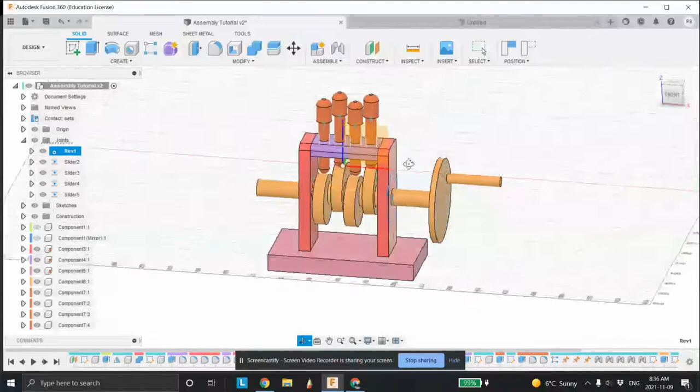Today I'm going to show you how to make an assembly like this. An assembly is components arranged together and designed to work together. In the old days when we used to have to design stuff, we had to do the top, front, and side view, and then you had to picture in your mind how things would work together.

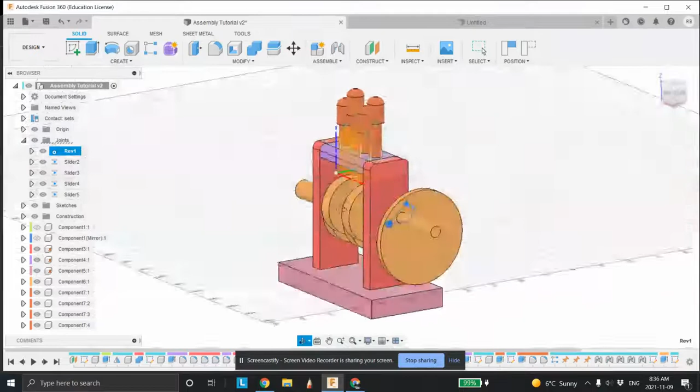Nowadays with more complex assemblies, this is a really nice way to design stuff. If I come in here right now, I can see it animate the model, and you can actually rotate it around and see, look for interferences and clearance issues and so on, to see how it's working. It's a really nice way too, when you're in a meeting, to explain how your design's working to somebody. Rather than articulating it, you can show them here.

So I'm going to hit the escape key. I'll show you, you can animate just the joint itself here, or you can come and actually drive the joint yourself and move it around, so you can see how it looks. You can rotate it around and move it wherever you like.

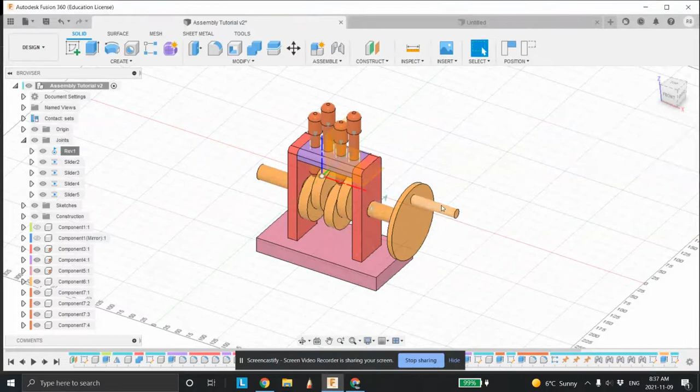So come over here. First thing we're going to do is I'm going to design these pieces here: the two side pieces, the top piece, and the base. And you can see what I've done here. This is a separate piece because what you would do is you would drill and tap these holes here, and you would mount these pieces across this way because these would be three separate pieces.

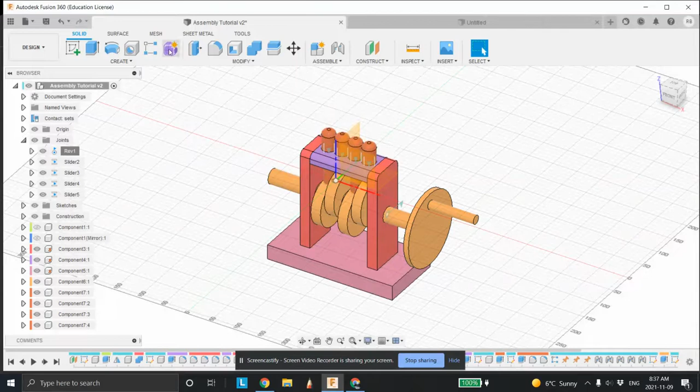Okay, so back to the original position. Now what I'm going to do is go to make a new piece. I'm going to come here and make a construction plane. I'm going to make it symmetrical, so that we're going to design something on this side, click the construction plane, and it'll mirror it on the other side. Makes it a lot nicer, faster way to do it as well.

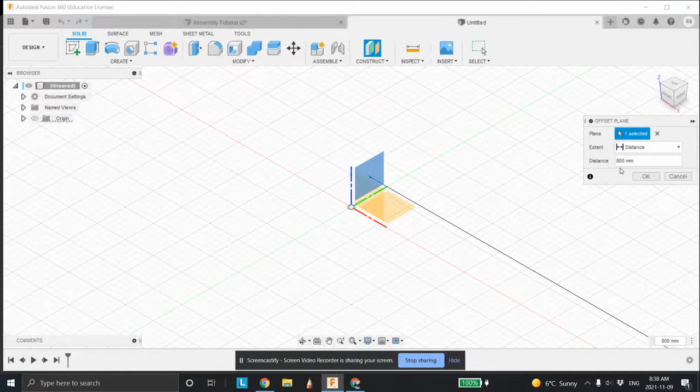Okay, so first thing I'll do is create a construction plane, click this face here, and I'm going to bring the construction plane over 80 millimeters this way. So 80 - well, that's 800. You don't want 800, you want 80. There we go, click OK.

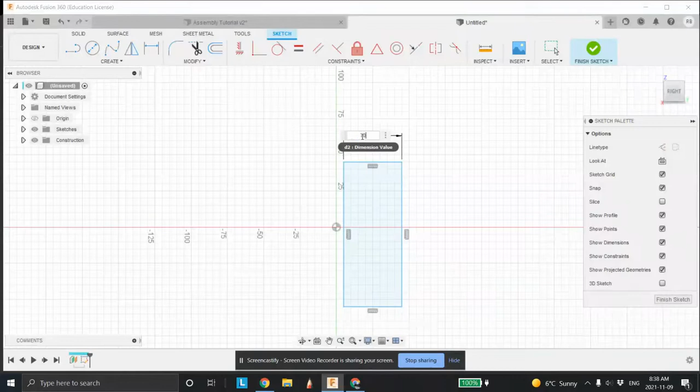Now I'm going to draw that piece here on this side of the one leg. I'll use the rectangle tool for this one right here. Come down like this. I'm going to make this size up here - I'm going to make it 70, and this one here, maybe like 200 millimeters high. And I finish the sketch.

And I'm going to right click on this one and press pull it. I'm going to pull it inbound, say 20 millimeters. It is 20. Perfect, done.

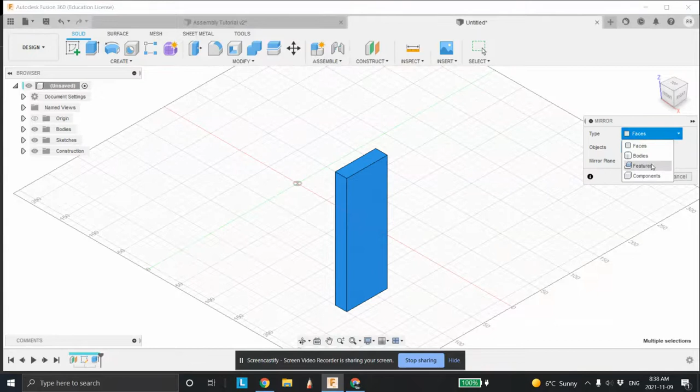And then what I'm going to do is come up here and mirror it. So I'm going to window this whole thing in. The mirror command is here. I'm going to select the bodies right here - there you go, the body selected. I'm going to make a new body. The mirror plane, I'm going to select it there, and click OK.

Now what I want to do is double check and make sure the dimensions on the outside are the right size. So let's measure it from there to here - 160. So 160 millimeters on the outside, 20 and 20.

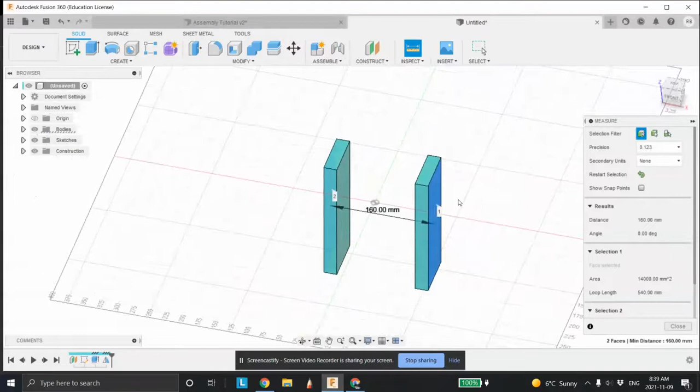So that looks good. Now what I'm going to do is make the bridge that goes across this way. So click this one here, I'm going to sit on that face right there. And when I do, you can see what happens - now I can't see it. I can't see the face I was drawing on because this one is blocking it.

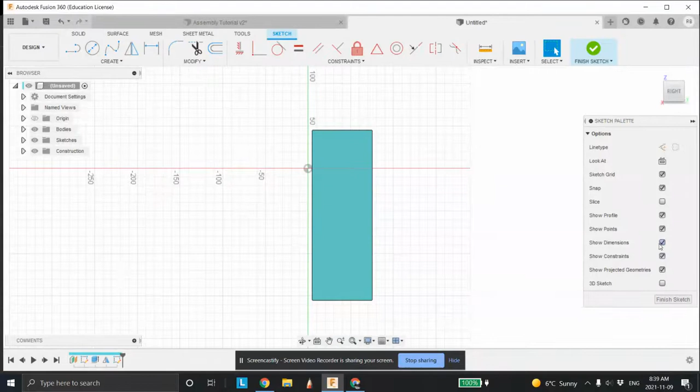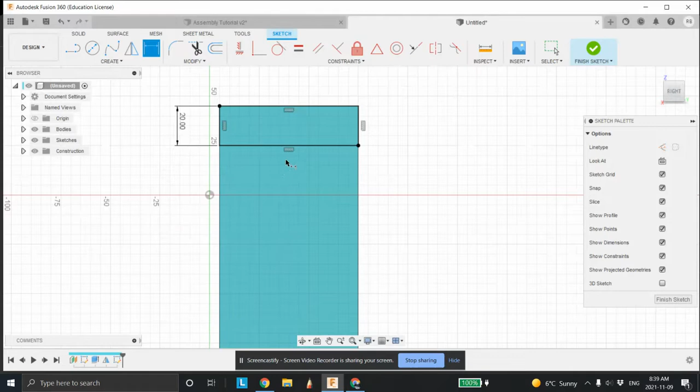So a nice thing to do is click slice. Now what the slice does is it removes that front piece that I was looking at, so now I can clearly draw on this one. So let's use the rectangle tool - come here, down to there, and set the dimensions up. I want this one to be the same as the rest of it, so 20 millimeters. I could have made it a little bit bigger, doesn't really make any difference. And now I can come up here, press pull it, and I'm going to come across.

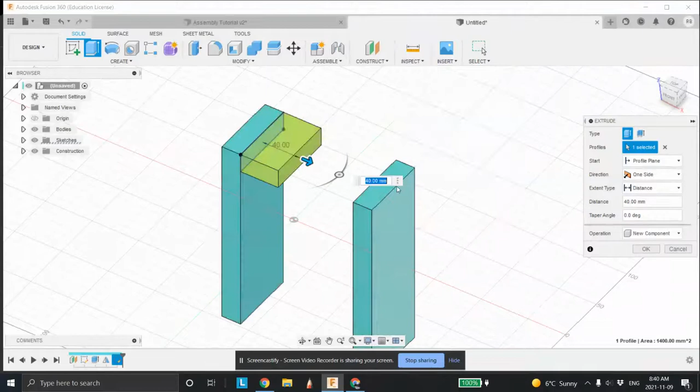Now I want this one to be a new component. As soon as I click new component, you can see what it does—it changes colors. That's because I have component cycling turned on. If I didn't, it would just be gray. I like to keep component cycling on when doing stuff like this, so I know I'm working on a new component.

I like to make things on components, so I bring it right up to there—touches there nicely. Everything looks good. Click OK.

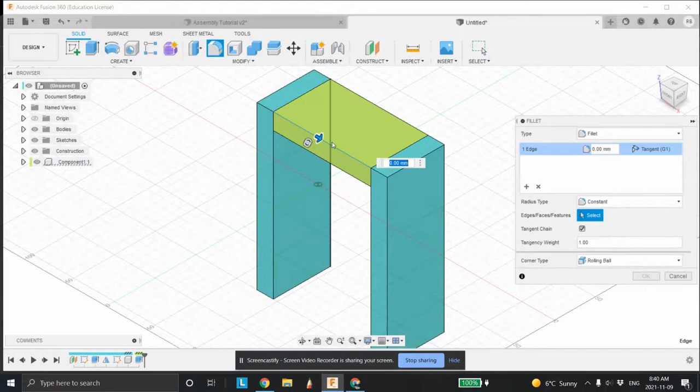Back to this home screen, now let's put some radiuses on it to make it look a little more professional. Just the top for now, we'll do the base in a second. I'll take the radius tool, come here, and set it to 5 millimeters—maybe the same here too, just to break the edges and make them look more professional. You could go bigger, like 10, but I think 5 looks good. So 5 millimeters and 5 again.

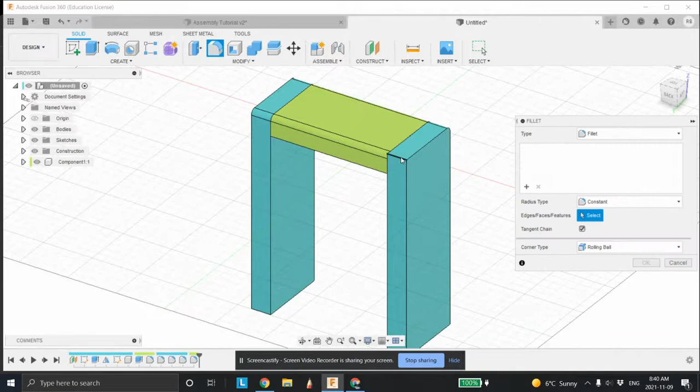Now I would normally put a screw here and a screw here to bolt these together, but I'm not going to bother for this at this time.

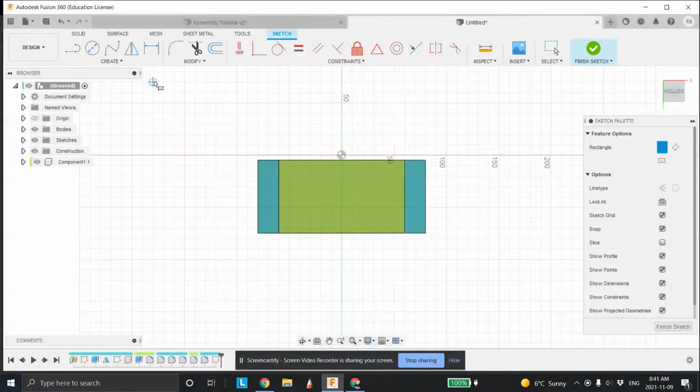Now let's flip it upside down and draw on the base here. I'm going to sit on that face right there and draw a rectangle, a 2-point rectangle, something like this. Size isn't really important. Let's check the dimension between here and here.

Let's set that to about 35. Let's do the same thing down here, from here to here—also 35. And from here out, let's just be consistent and make it 35 as well, and from here to here, 35 too.

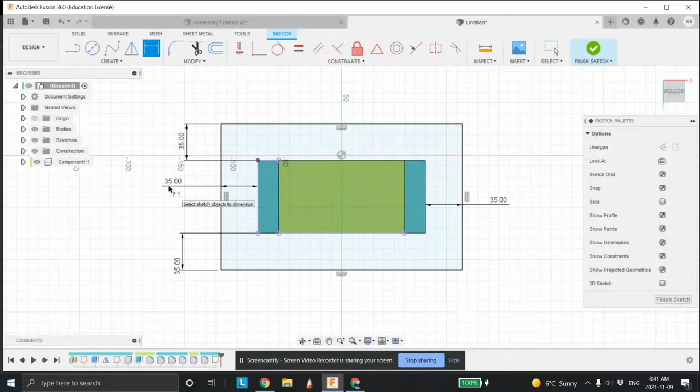Finish the sketch, flip it up the proper way so it flips around like that. Right click, press pull. Now when we press pull, we want to make sure it pulls everything—you can see right there it wasn't going to pull this. It doesn't really matter, but I think we should make it look good.

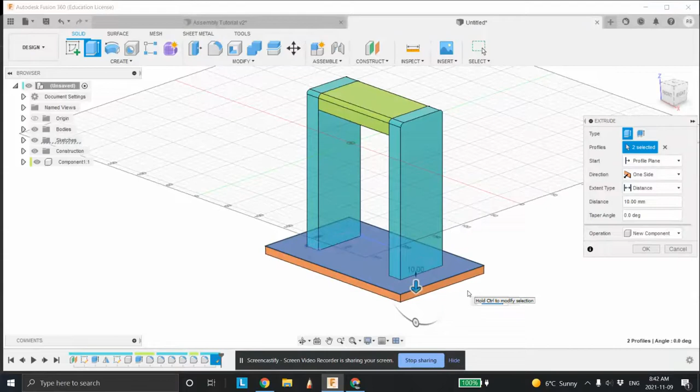Again, we want to make a new component, so it should change colors. The base doesn't have to be too thick—I think 10 millimeters would work nicely. There you go, so we have that.

Now we're going to put a hole through here so we can start working with that. I'm going to hide this thing because it's getting irritating, and let's put a hole in this piece right here.

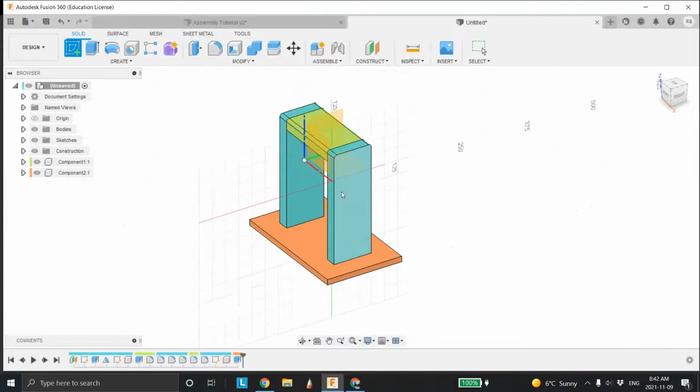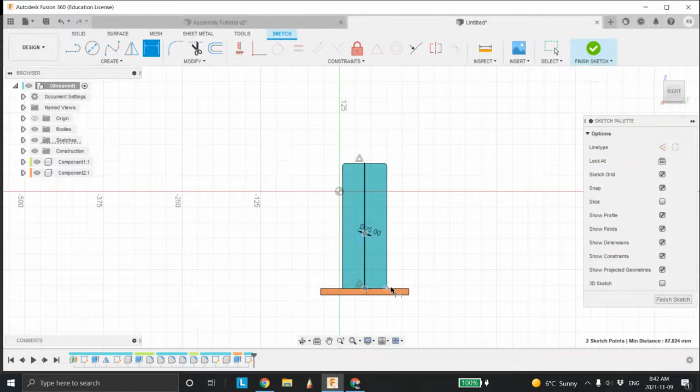We'll sit on that face here. I'll draw a line down the center, from the center of this to the center of that, to use for drawing my circle. I'll bring my circle tool in here and make it 25 millimeters in diameter—that should work nicely. Let's set the dimension from there down to the base at 100 millimeters and finish the sketch.

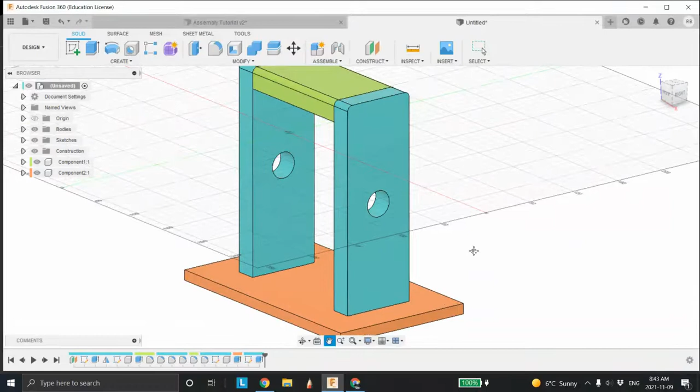Now I'm going to come back and delete this construction line here—I don't need it anymore. Then I'll take this and press pull, pushing it right through. You can see it's in cut mode, so it's cutting a hole. So we cut the hole, and there it is, cut through now.

Now let's make the bar that goes in the center. We'll sit on this face, and let's slice it so we can see where we're working. We're going to click the bar here in the center of that thing—I think 40 millimeters should work.

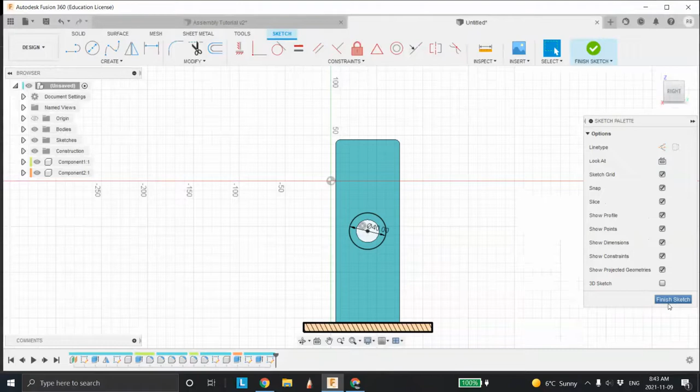Finish the sketch. Now I can click this one here and hold the control key down, then click this guy too, trying to get them both—sometimes you have to play around with it. There you go. Control, right click, press pull, and let's pull him over. Again, I'm going to make a new component, and this component I'm going to use for a few different things.

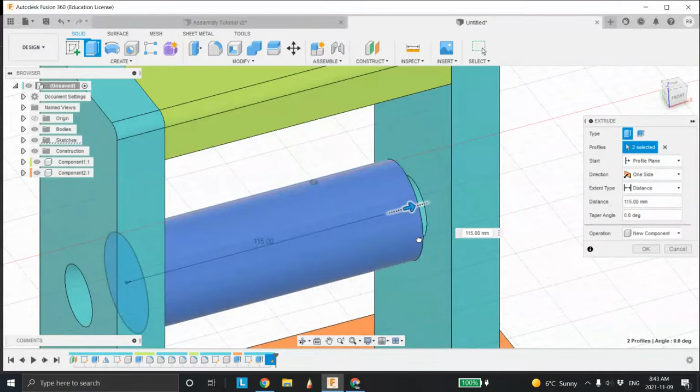So I'm going to bring that guy right over until it taps onto there. Perfect, click OK, it's a new component. Good. And now I'm going to come in here and bring a spindle through there.

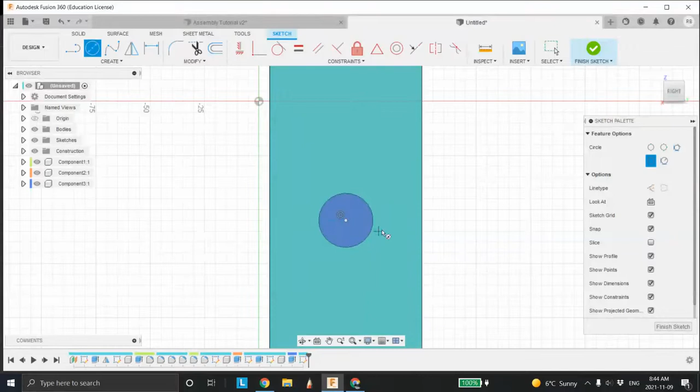So I'm going to sit on this face right here and draw it on that face, the same size. It would have to be a little bit smaller because otherwise it would jam, but for this purpose today, we're okay. Finish the sketch, right click, and press Push/Pull.

And I want to join it to the original. So let's bring it out. Let's see how far I want to bring that out. 60 millimeters, let's go 80. 80 looks okay. I click OK, and now it became part of that component.

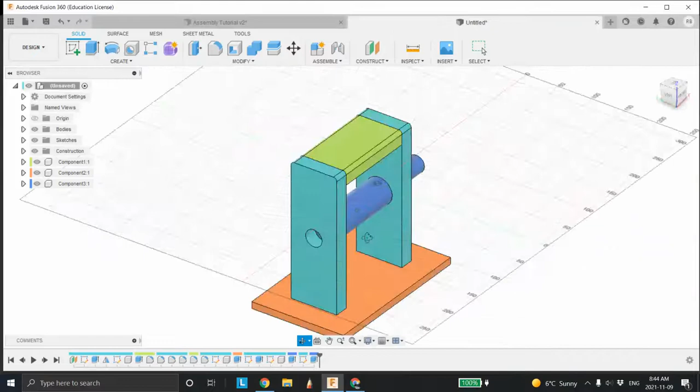Now I can come over here and draw another one on that side, or I can use my mirror tool. Once again, I can say mirror it, and let's put this little guy here, bodies, feature. Let's grab that feature and select the mirror plane here, and he's gone on the other side, and he's joined as well. Okay, now we want to go in and start putting the holes in there.

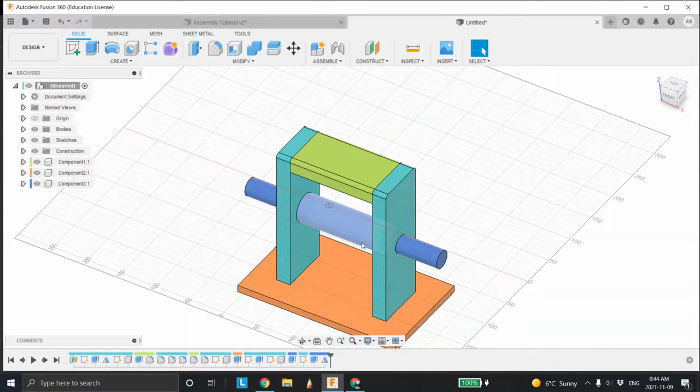What else have I got? Let's put the holes across the top. So what I want to do, actually, no, let me think this for a second. Yeah, maybe I will finish the holes across the top.

So we're going to come up here, sit on this top face, and I'm going to put the line from there across to here, like so. Make sure it's recording, and I'm going to draw that line across.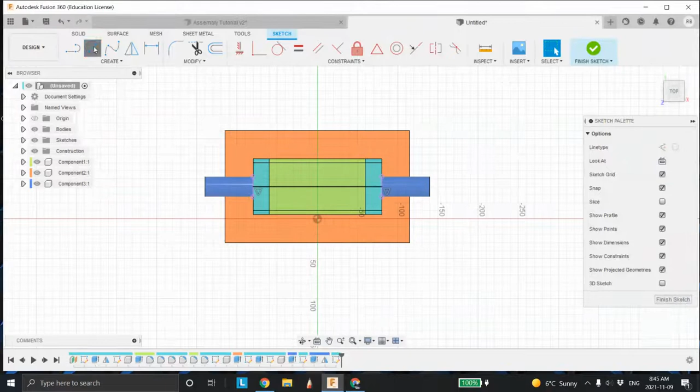Now I'm going to bring the circle tool somewhere like this here, and I'm going to make it 10 millimeters. So come here and go 10 millimeters like so.

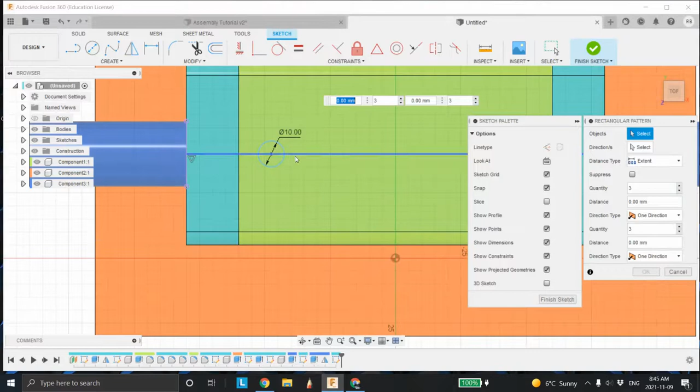Now I'm going to stay in sketch mode right now, and I'm going to go to rectangular pattern, and select this line here, and select the opposite direction. I'm going to change it to spacing, and I've selected it already. Object selected. Direction I have yet to select, so let's select the direction this way, and I want 4 of them.

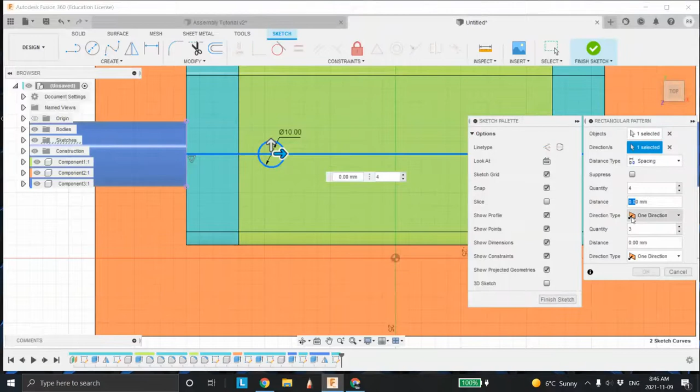And the distance is, oh, got 4 of them. The distance is 28 millimeters, I believe. Let's see how that looks. 1, 2, 3, 4. Not bad, but I want to move it this way a bit, I think.

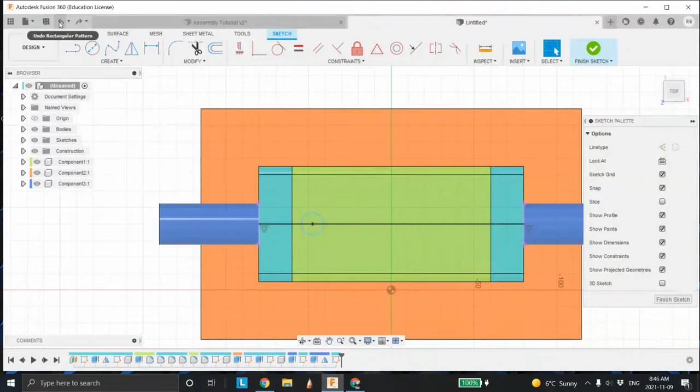Nope, let me fix that. Let me undo this guy. Let me fix this up for a second.

Okay, so circle tool here, 10 millimeters, I'm going to make that 10 millimeters. And from the edge over, from here to the center of that thing, I can make him 18.

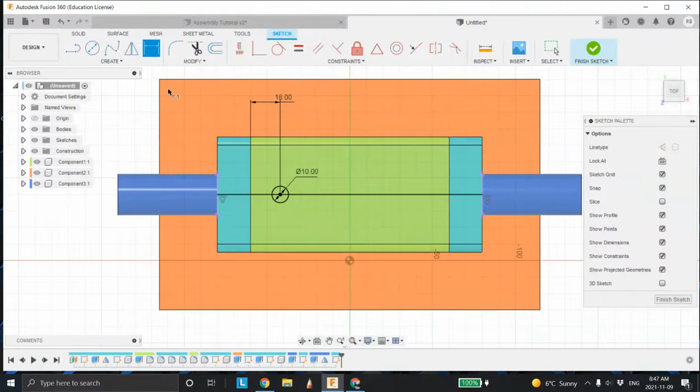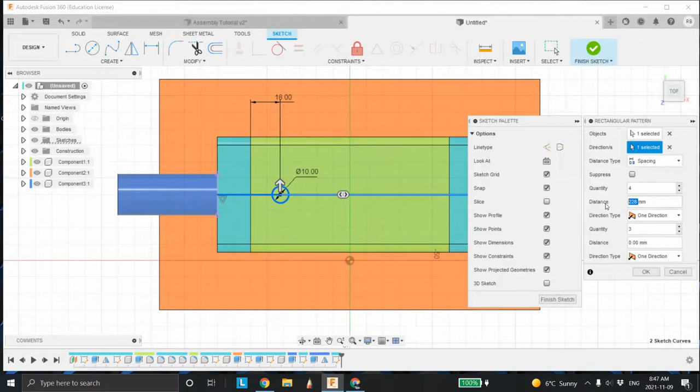And then staying in the sketch mode, go over here. I'm going to go to rectangular pattern, and we're going to select the object. I want this one. The direction is going to be here. Change it to spacing, which it is. I want 4 of them, and the distance in between is 28. Not 228, simply 28. Enter.

And there we have it. They look good, they look like they're in the right spot. And I finished the sketch.

And now I'm going to delete this line here so that it doesn't get confused when I'm doing that. I can see an extra line here too that I'm going to delete, I don't know why it's there. And there's also one over here, which I'm not sure what it's there for.

So now we're going to come in here. We're going to click this, pull the control key down, click these guys here, here, and here, here, here. There we go. Press Push/Pull, and if I pull it down through, it's going to cut it.

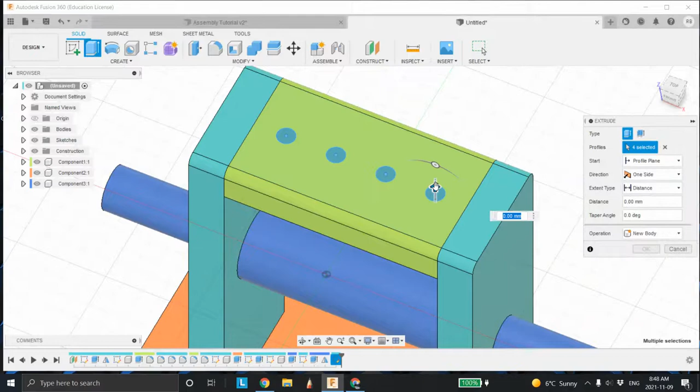And let's scroll up and make sure it's come all the way through. I didn't inadvertently leave it like that. And yes, it's all the way through. It looks good, I'll cut the hole.

Good. All right, so now we'll put in some cam lobes. The cam lobes, excuse me, the cam lobes, I'm going to create a construction plane. I'm going to sit on this face here, and pull it out 8 millimeters.

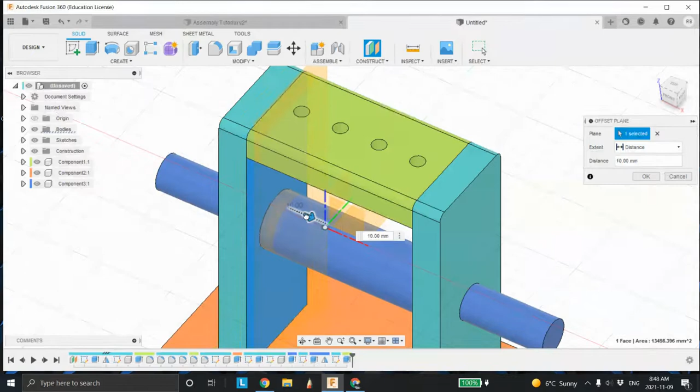And you can see there, now it's 10 millimeters out, so now I can draw on that face. Of course, when I go to draw on this face, it's hidden again. So let's do the slicing thing, and it shows me the face, right?

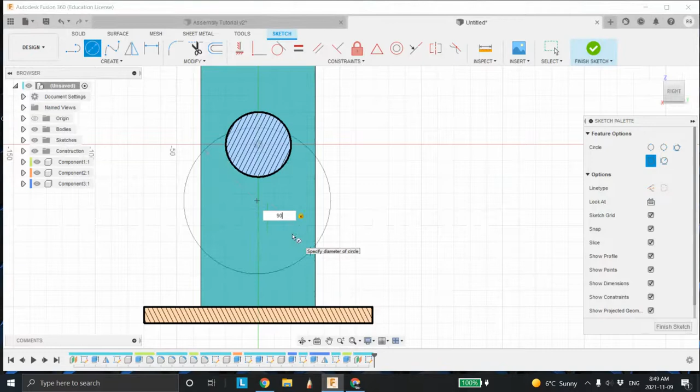I click down here to draw a circle, something like this, maybe 90 millimeters. Like that, and let's say from here to the center of this guy to the center of this guy here, for mine, maybe make him 15. Looks good there, finish the sketch. Let's see what this looks like.

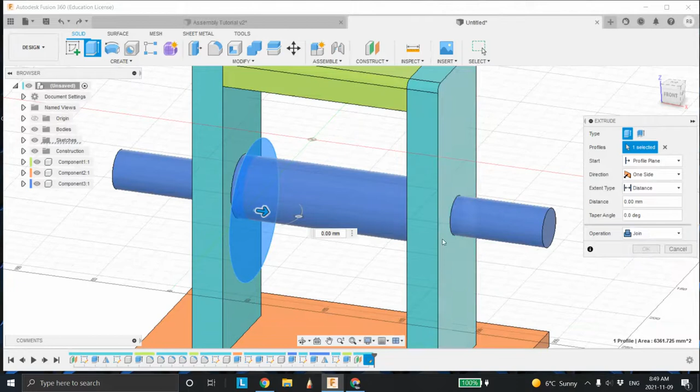Right click this one, press pull him out 10 millimeters. Okay, whoop. Press pull, join, and bring him out 10 millimeters. That's good, there you go. Nice, so I've got one cam lobe there.

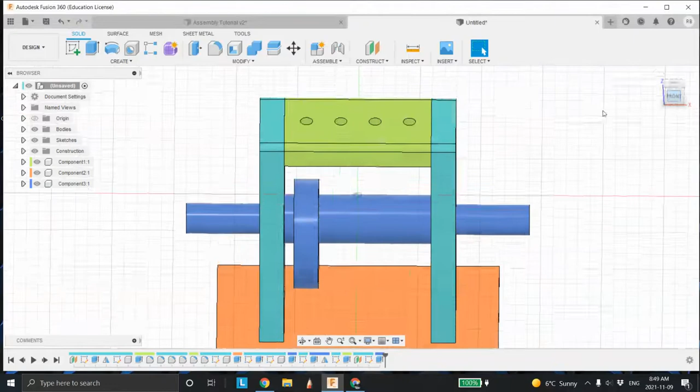It doesn't look like it's in the right spot. Let me have a look here. No, that should be out further. Let me bring that back out, press pull it out to 20 millimeters. Yeah, there you go. That's in line, the first one was too narrow.

Okay, so now I'm going to do another cam again. I'm going to come here, press pull the surface here, bring it out. But what I'm going to do is go new body here. I'm going to leave that one-sided, and offset it by 8 millimeters, and I want to bring it out to...

I got it a bit too early. Right click, press pull, let's bring it out to 20 millimeters, click OK, and it didn't join. You notice it's not part of it, so I'm going to come back and edit the feature, and make it join to the original, like so.

Now what I'm going to do is twist this. I could put all the cams across first and then orientate them afterwards. Actually, that's probably what I'll just do, that'll make it easier. I can mirror image them across, so I could continue the path I'm doing now, or I can go here and select this and select that, control.

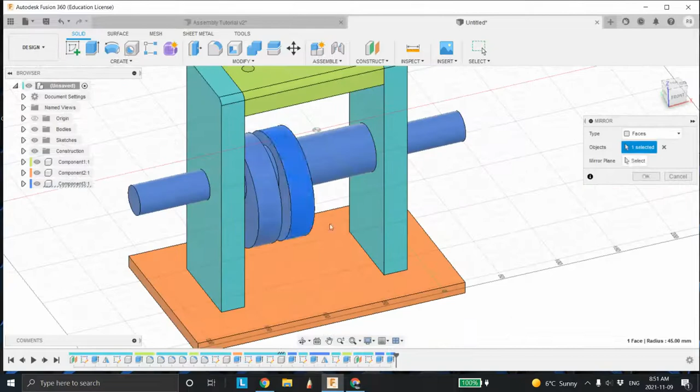Actually, let's do faces. I'm going to go here and here, here, here. It's hard to tell because it's the blue color, right? So we got 1, 2, 3, 4, 5, should be 6 faces. I'm not sure which face I missed, so I'm just going to do it again.

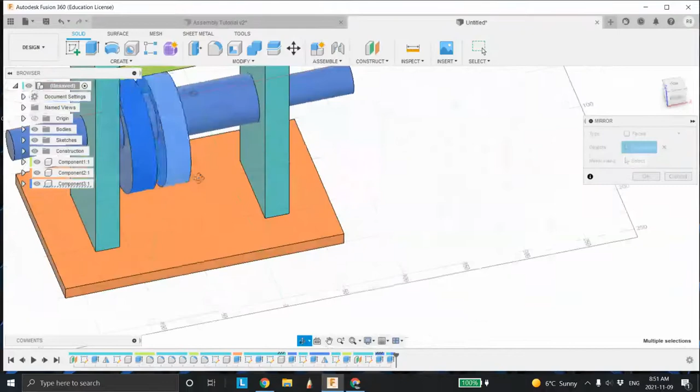It's hard to tell because it's the blue color. It's not, so faces, select. That's 1, 2, 3, 4, 5, 6. Okay, 6 selected, this time it worked nice. Mirror plane, I'm going to check, make sure I get in there and get this proper mirror plane right there. There we go, click OK, and now I've got all my cams sitting there.

So now what I'm going to do is rotate the cams up. I'm going to go to move, copy. I'm going to select the bodies, grab him, and select the end here.

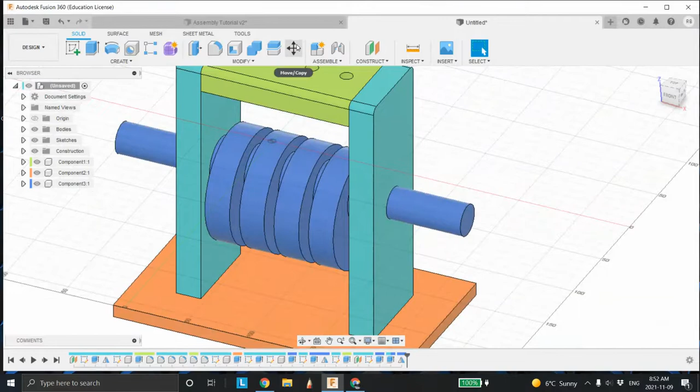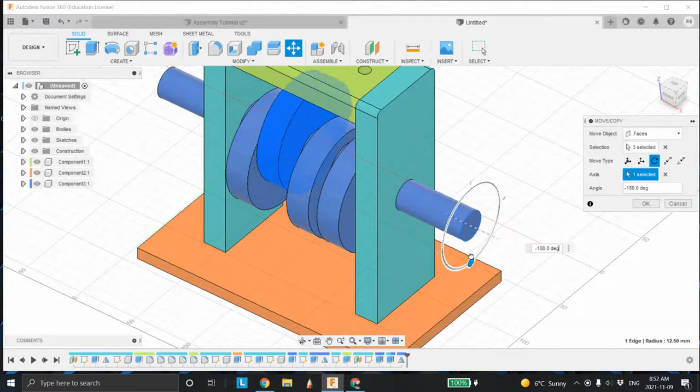I should change the color, the color is difficult. So here, three faces selected, that's right. I want to make it rotate, and rotate around the surface here.

And I want to bring it up to 180, like so. So you see that cam's up, cam down, cam up, cam down. We'll bring this one a little up as well.

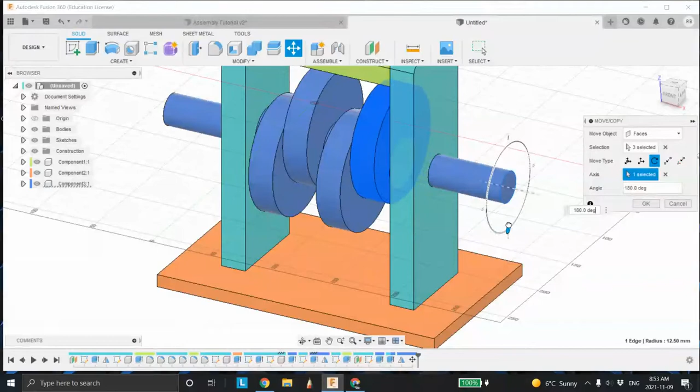So do the same thing, move copy, select faces. I want 1, 2, 3, 3 selected. We're going to rotate it. Now I have to select the axis I want to rotate it on, which is this axis right here. And I can rotate him up the same thing, 180 degrees, and click OK. And there I have it.

Okay, so now we're going to design the pins in here, and then we'll put a crank at the end of it as well. So let's put the pins in. Those pins would come down and sit on this. So I'm going to draw on this face right here.

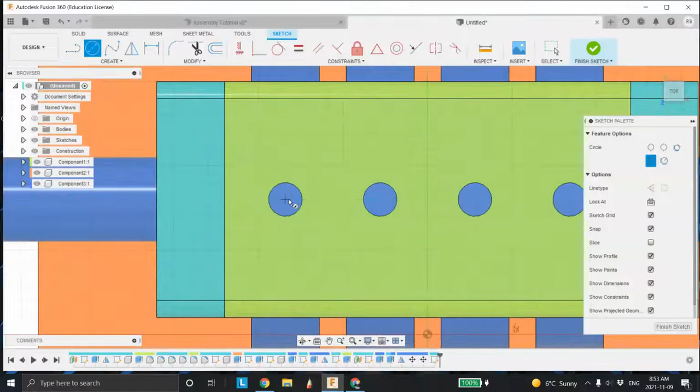I'm going to create a circle. I'm going to zoom in here, and just create a circle like so. I'm going to click finish sketch, and then extrude that circle, press pull it. I'm going to press pull it in 2 different directions, so one side, 2-sided. All right, the top one I'm going to pull up like this.

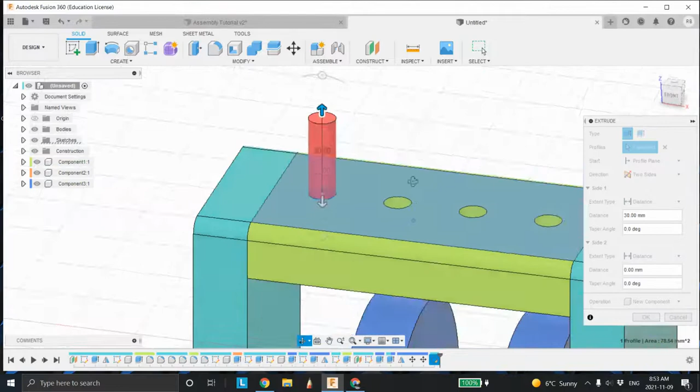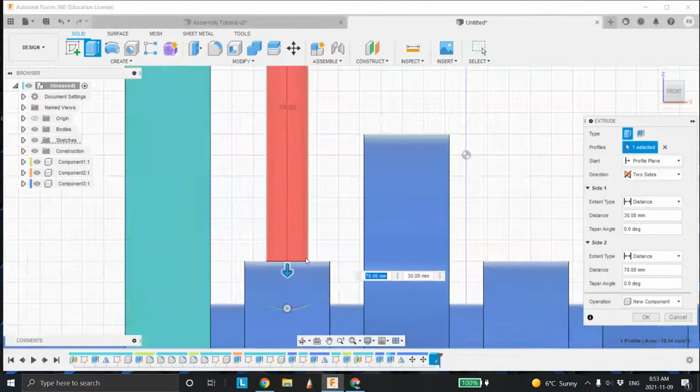I want to make sure this is a new component. I'm going to grab this and pull it down so it sits right on the cam lobe. We're pretty close now. If I click front view and zoom in, you can see it's touching, but I want a slight gap there, otherwise you'd have binding, especially with a spring up top. So let's pull it back—if that's at 70 right now, let's go 69.5 and give it a bit of a gap to sit on.

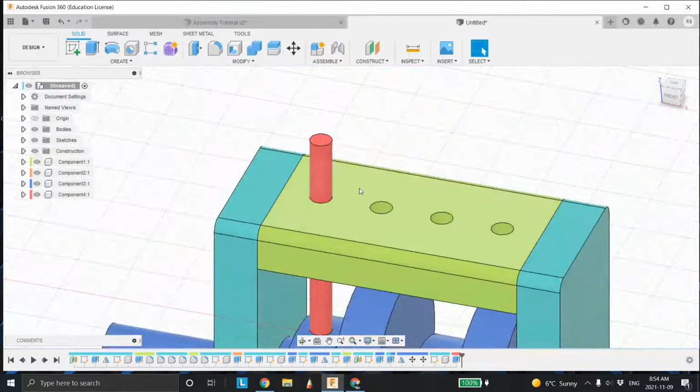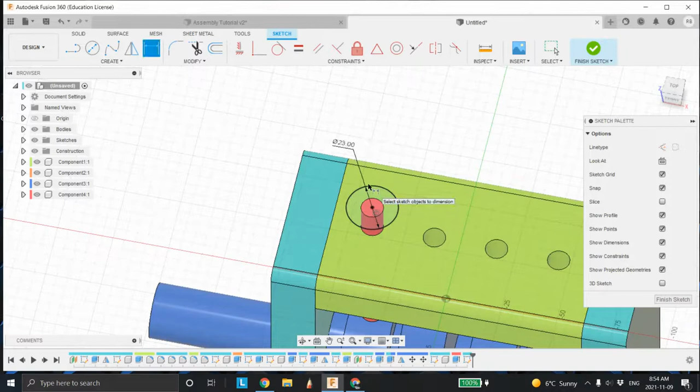Scroll out now, like so. I want to bring this piece down a little more, so I'll right click, press, pull this down to about 15 millimeters above. Click OK. I'm going to sit on this face and put some heads on this thing, come out like so, and the diameter is 23—let's make it 23 even. I'm going to finish the sketch and extrude this one up and down like that.

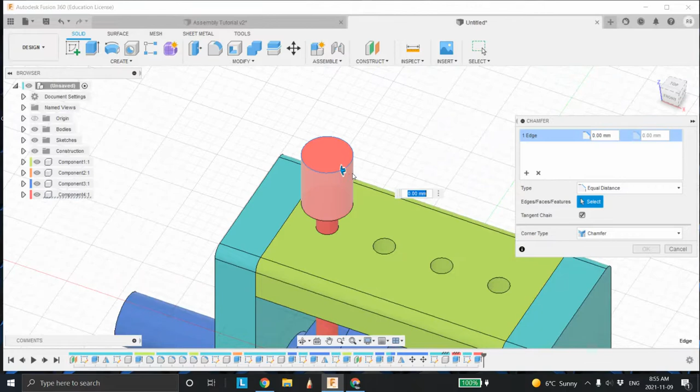Go to front view and let's see how high—let's go 30 millimeters, yeah, 30 looks good. Click OK, like that, looks good. Now I've got a nice bit of a gap here, which is good. Now I'm going to put a radius on the top—actually no, I'll put a chamfer on the very top one. I'll click Modify, Chamfer, and chamfer this 2 millimeters. All right, looks good.

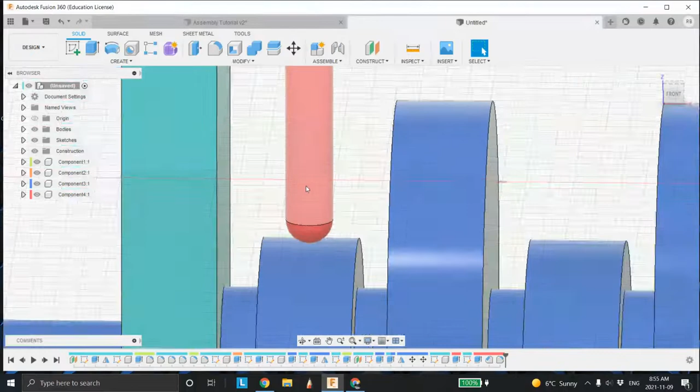Now, a real cam lobe, if you've ever looked at them, always has a radius on the front, so let's do that now. Let's come in here and make this 5 millimeters—see what it looks like. A little bit of a lag there. 5 millimeters is pretty reasonable because it's the actual radius of this, so that would work nicely.

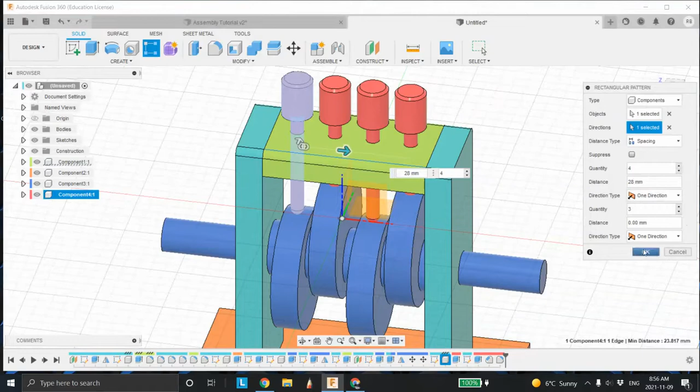Okay, now I want to copy these down. I've drawn those out—let's pattern it. Select the bodies or components—actually let's just select that whole component. For the direction, this is in the way, I can't see it, so let's move it up. Select the direction of this. Good. Spacing—if you remember before, we're going to do 4 of them, and the spacing was 28. And it populates nicely. You can see them buried in there, but that's okay, we'll fix it later on. Click OK, and there we have them in position.

So nothing, as of yet, is moving. That's going to be the next video.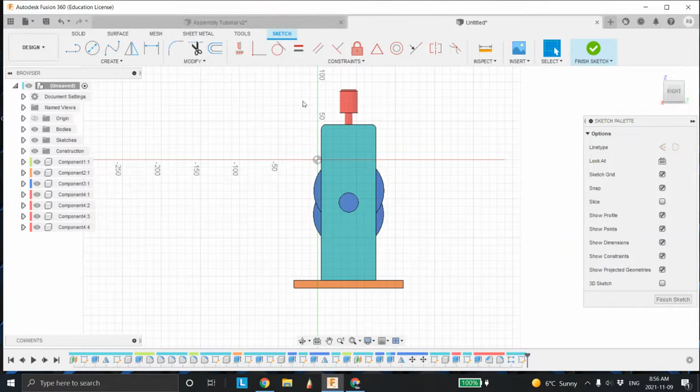So now let's do a crank—let's put a crank on the end of here. I'm going to sit on this face, and I'm going to make the crank part of the same assembly. If I make it blue like the rest of it, it'll spin with it. If I don't, I have to constrain it.

So let's just put something—you can design any crank you want, I'm going to do a circle one. I'll finish the sketch, right click, press, pull this thing out, and bring it out to about 10 millimeters out the center too. It looks good, it's joining, so it became part of it. Perfect, so that's part of that component.

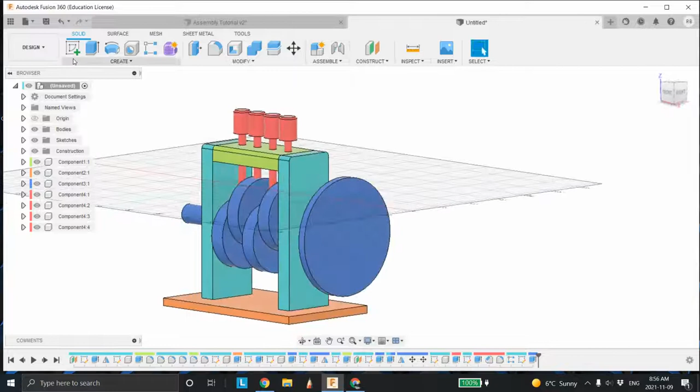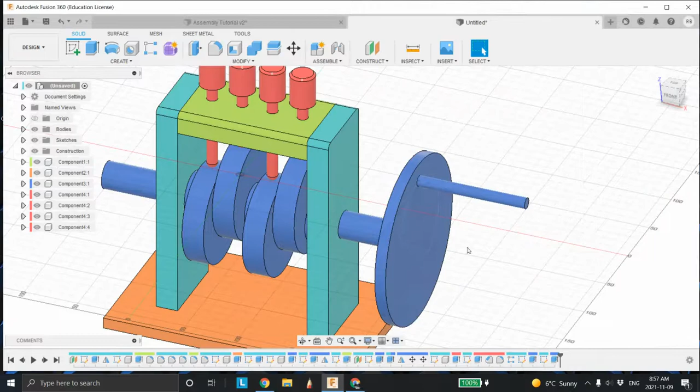Now I need a handle. So I'm going to sit on this face right here, and let's do a little bit of a handle right in here, maybe 10 millimeters—see how that works? Yeah, 10 millimeters looks okay. Right click, press, pull that 10 millimeters, and this 10 millimeters, pull him out. That's probably too wide, but 100 millimeters looks good. Joining that, and there we have it. So now we should be able to crank this handle, and these things should go up and down.

Then in the last video, what I'm going to do is come in and put a brake in here to stop it from moving. Okay, so that's the first video. In the second video, we'll come back, do the constraints, and make it come to life and actually work.